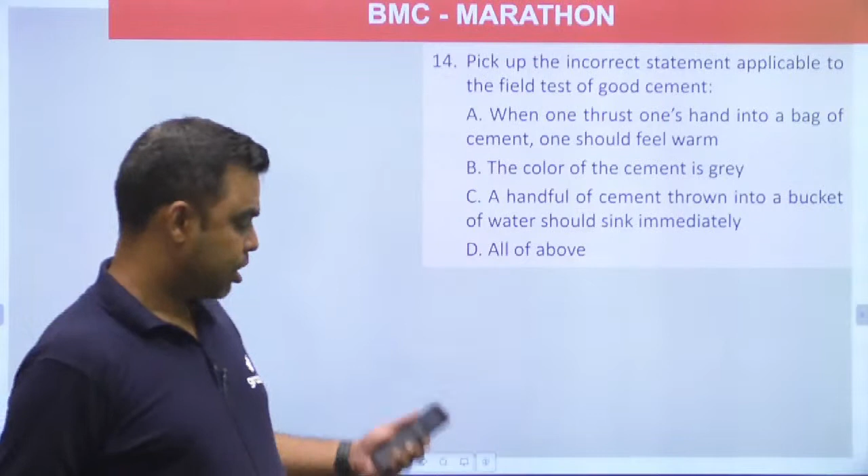Incorrect statement. Guys, it is written over here, one should feel warm. This is wrong. Rather, one should feel what? Cool. Like Dermi Cool, right? Further, color of cement is grey. No, it is greenish grey. Agreed? Should sink immediately? No. It should float for some time, and then sink.

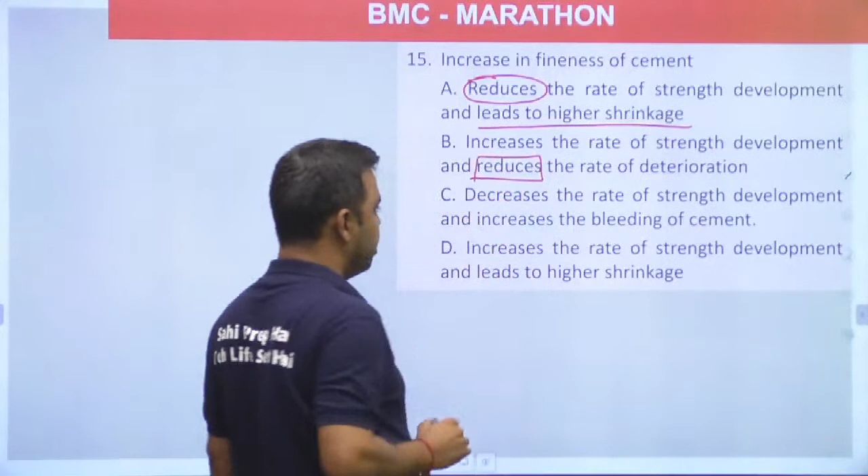No guys, it increases the rate of strength development and it reduces the bleeding, because finer is the cement, less is the water wasted, right? Increase the rate of strength development and leads to higher shrinkage. Yes, answer will be D. Answer will be D, because finer is the cement, more water will react. Water will react faster with the cement.

So faster it reacts, more is the heat of hydration, and if more is the heat of hydration, more is the drying shrinkage. Over here, this will be shrinkage, and this will be called as drying shrinkage. There are different kinds of shrinkage. This will be called as drying shrinkage.

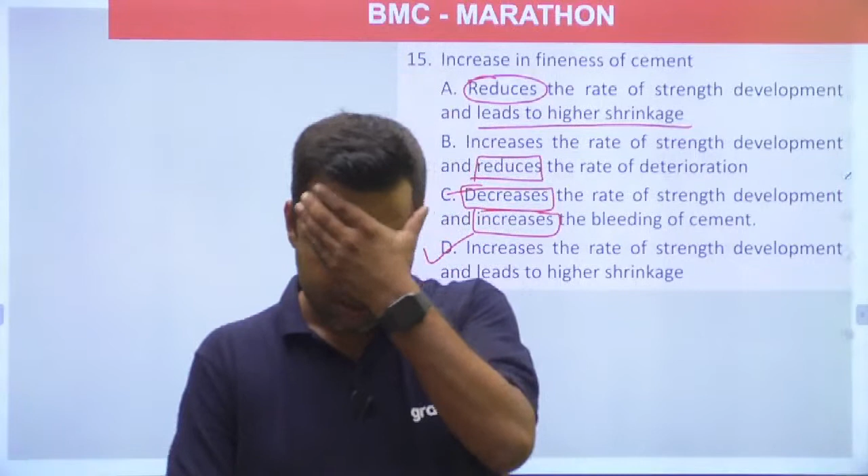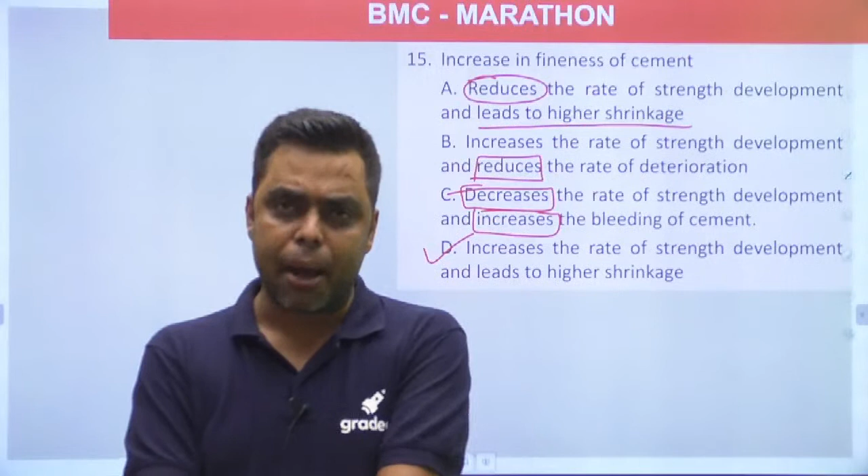Deterioration. See, what do I mean by deterioration? Like basically, do you know maida? Rathod ji, do you know maida? Do you know dalia? I'm going to tell you a very nice explanation on this. Okay, you want me to explain it in Hindi? ठीक है, I'll explain it in both languages. Do you know maida and dalia? Do you know flour, atta?

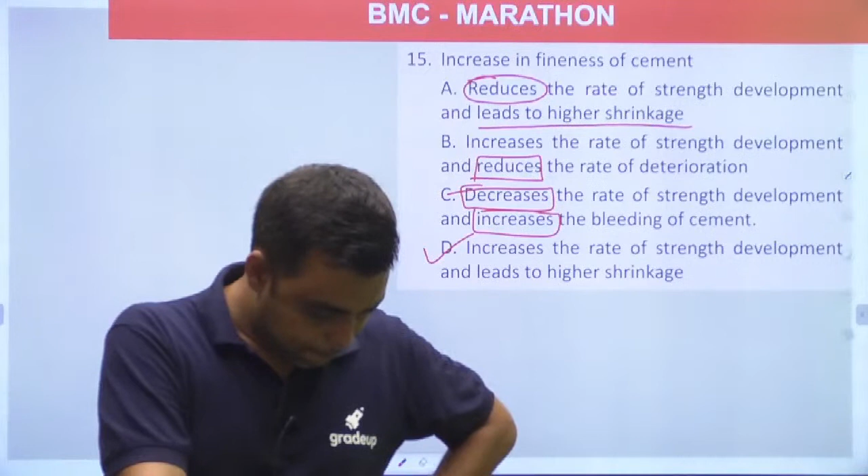Yes, Harshita ji, don't worry. I'll explain in English also. Now, basically, you know what is the raw material for dalia? What is the raw material for maida? And what is the raw material for flour? That is the atta. You know the raw material is same for all of them, and that is what? Wheat, gehu.

When you grind wheat on a lesser side, मतलब अगर कम grinding करोगे, then it is called as dalia. When you grind it finer, ठीक है, और ज्यादा ग्राइंड करोगे, then it is called as atta. When you grind it finest, then it is called as maida. And people tell that wheat is good for health and maida is bad for health. So beyond a certain grinding, what happens? The deterioration starts.

Right? The deterioration starts. And basically, when we grind cement even finer, 2250, 3000, 3250, these are the fineness values. So when we grind OPC even finer, it is more prone to react with the atmospheric moisture, and it is more prone to react with the atmospheric oxygen and the air.

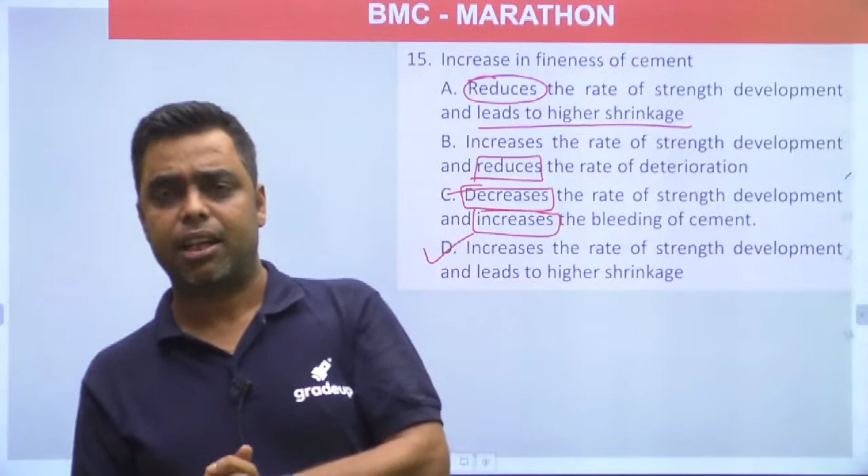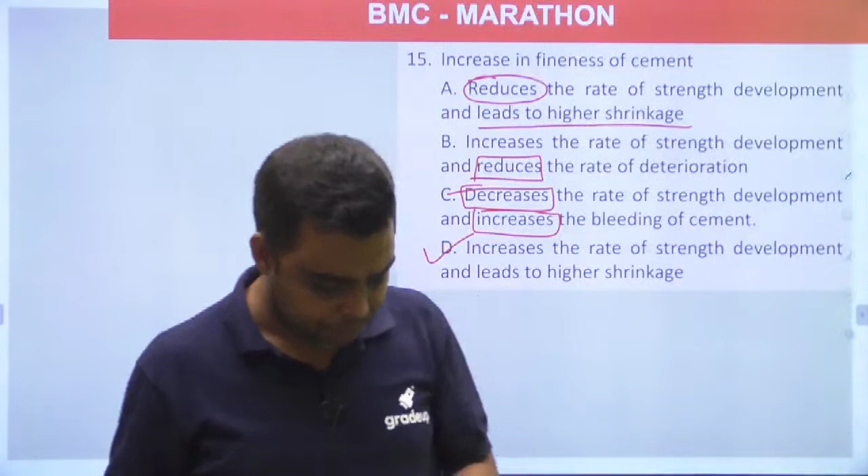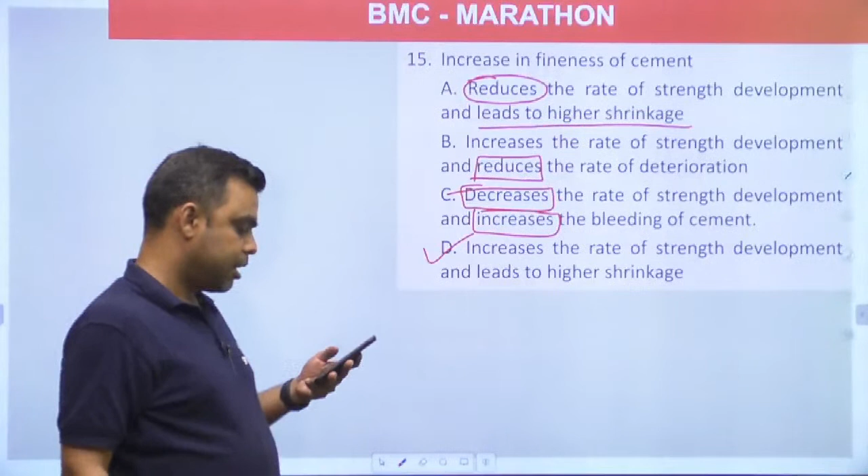So when it reacts with the air, what happens? Basically the lime which is present over there, that further dissociates. Agreed? That's the point. Yes, everybody got it? Clear? Next.

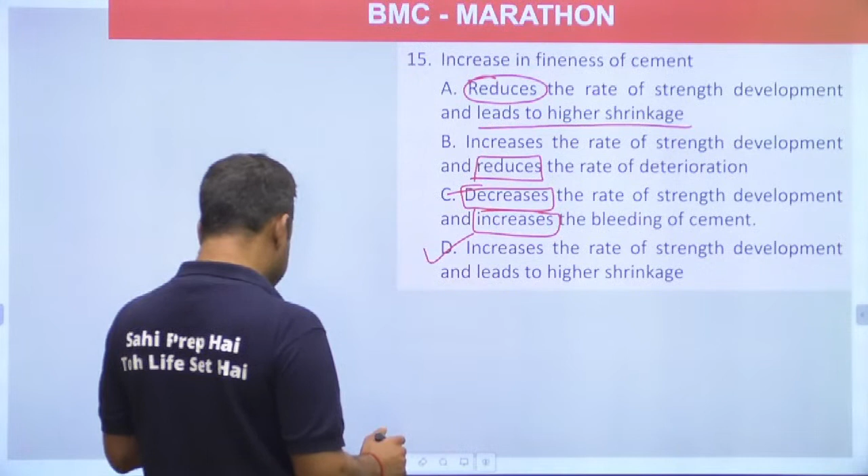Praveen ji, did you get it? Harshita ji, did you get it? Praveen ji, did you understand it? I guess the language was not an issue for both of you. Welcome. Harshita ji, you also understood?

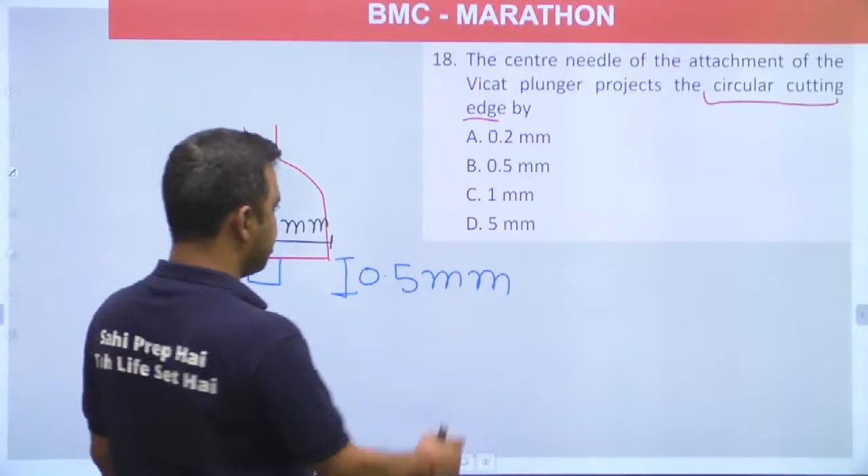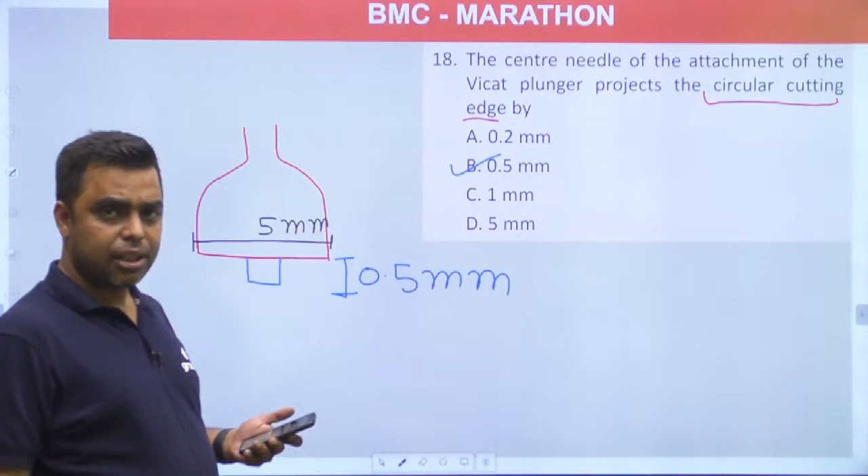Yes, so answer will be B. 1 mm square is something different. 1 mm square is the size of the needle. This is 1 mm by 1 mm.

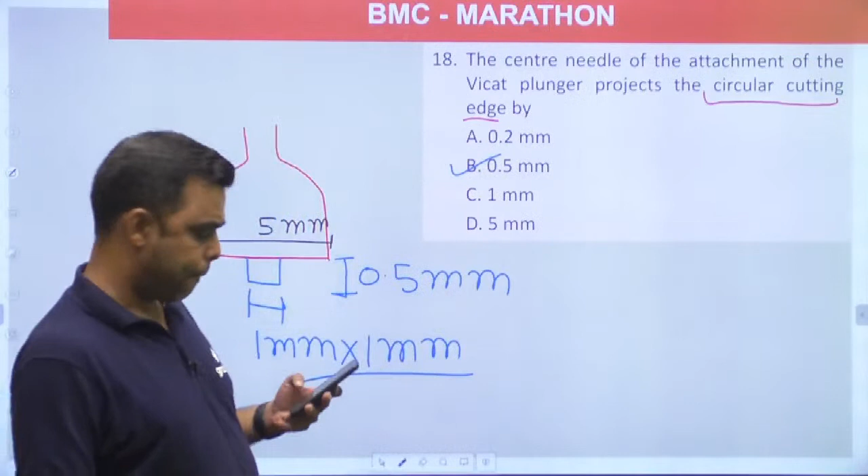Amit ji, basically 3 marks question. Every question will not be appropriate to 3 marks. Right? Certain questions will be lengthy and certain questions will be shorter. If BMC is in the syllabus, what numerical will you ask in BMC? Right? So don't think that way. Just concentrate on the question, brother.

So quick setting cement, Delhi. I will form a numerical in this. Quick setting cement has initial setting time of 5 minutes. Then I will ask, what is the square of the ratio of final setting time by initial setting time of quick setting cement? Right? Shall I form a question like this? See, these type of questions will not be asked.

Right? So don't worry, Amit ji. Brother, don't worry. Whatever I am solving, the day you will give your paper, you will remember me. So many of you have followed me before the ESE prelims, and during ESE prelims, they got the same questions from the sessions which I took. Absolutely same questions. Some of you might be witness of it. Am I right or wrong? Some of you have followed me since the starting, and they must have noted that the questions which I taught in the session were asked.

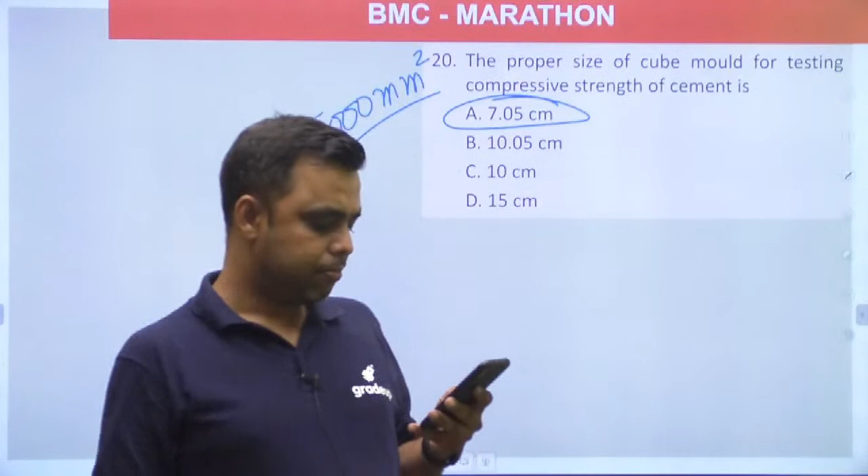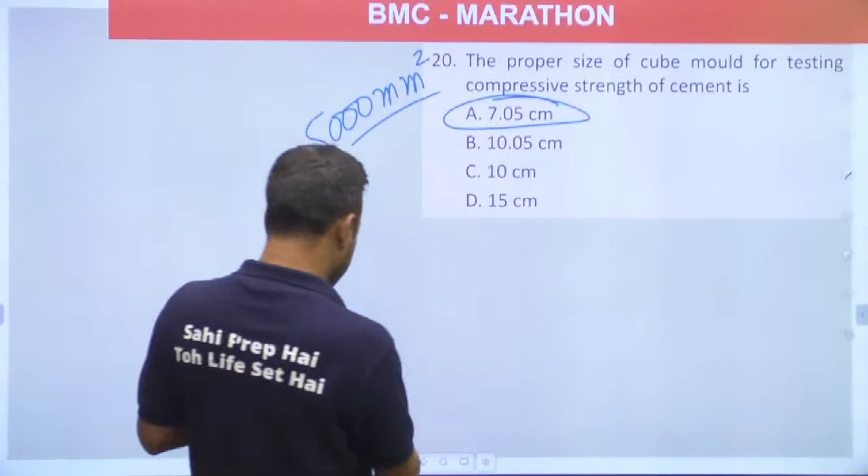Next, compressive strength of OPC 33 after 3 days. Are you guys aware about it? So, compressive strength of OPC after 3 days. For 3 days, it is half of 28 days. For 7 days, it is approximately two-third of 28 days. Right? So answer will be what? OPC 33, 3 days, half. Nearly 16. Clear? Next question.

Sani ji, I used to teach. If you want, I can teach. See, I can teach almost every subject.

So guys, this question is something new for you. Good afternoon, Masoor ji. See, after this 1982, we have a couple of revisions. One was in 2009 and, if I am not wrong, 2019. 10262, this is the code for mix design. A, B, C, D, E and F. Like this, the cements were classified: 32.5 to 37.5.

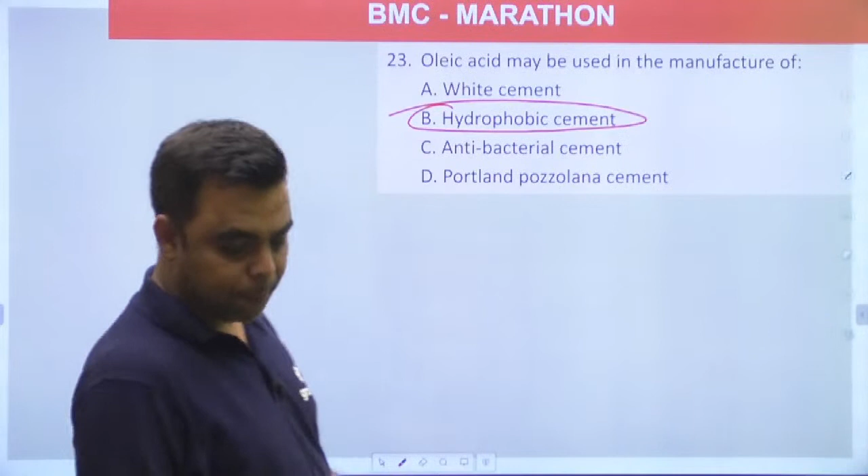Good one. Next, this one, very easy, very easy. See, for 43 grade 28 days strength, so it will be 43. So for B it will be 2. For B it will be 2. So answer will be either A or B. C and D cannot be the answer. That is for sure. Right?

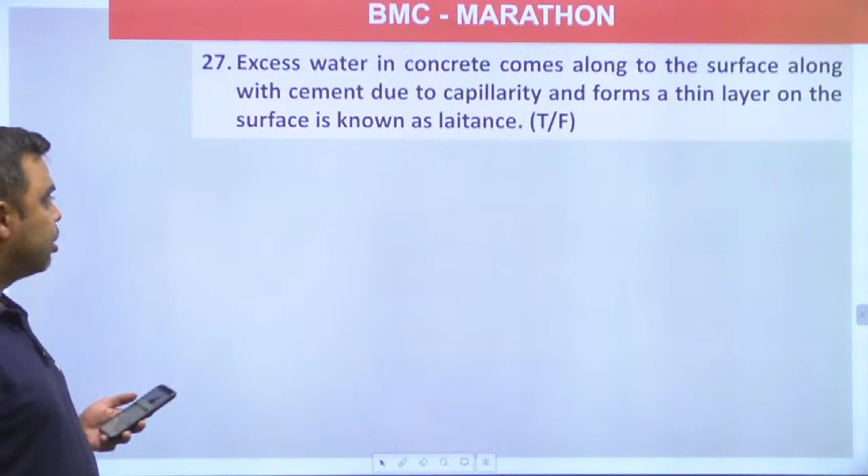Saurabh ji, done? Is it done, Saurabh ji? Sure. Next question. Many of you have answered this question already. What is the answer? True, right? True.

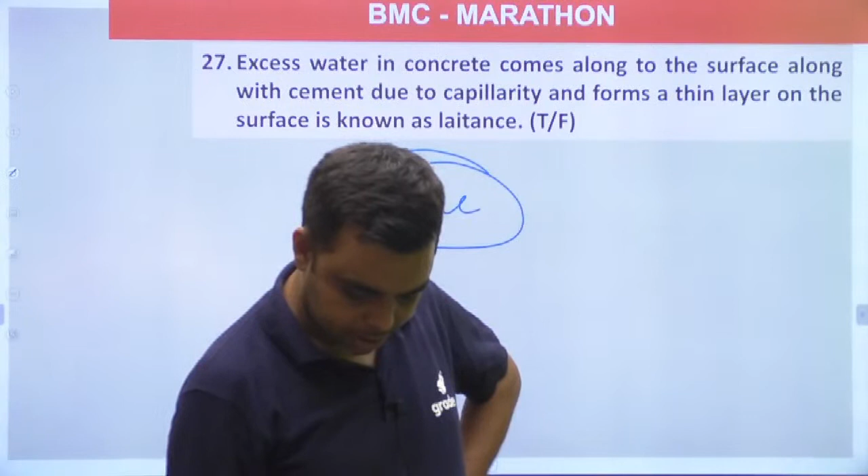Right, Amit ji, not only capillary, there are many reasons for the bleeding. There are many reasons for the bleeding.

There are many reasons for the bleeding. Yes.

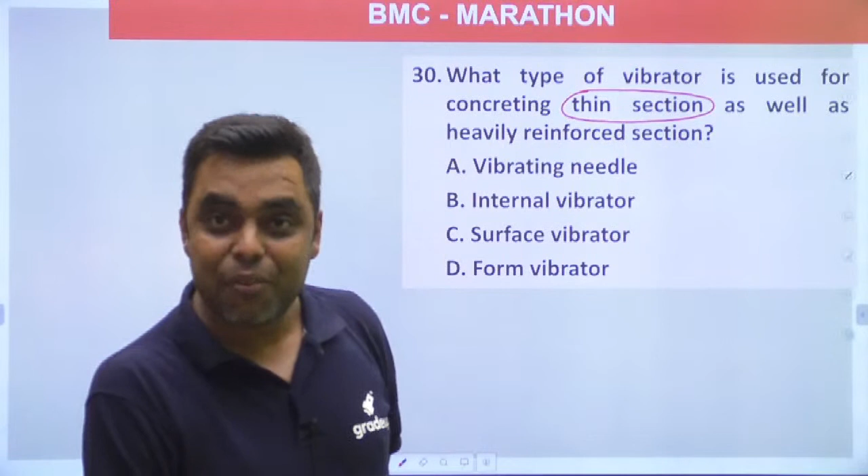Guys, just read the question. I again and again repeat that ijjat given to the question is directly proportional to ijjat received. Guys, are you aware about this fact that vibrating needle and internal vibrator, both of them are the same thing?

In KBC you have lifeline. This is my KBC, right? Thank you Sani ji, thank you. This is my KBC, so there is no lifeline. In life you don't have options always, brother. अभी जीवन जियो, आगे पता चलेगा। हमेशा जीवन में ऑप्शन नहीं मिलेगा।

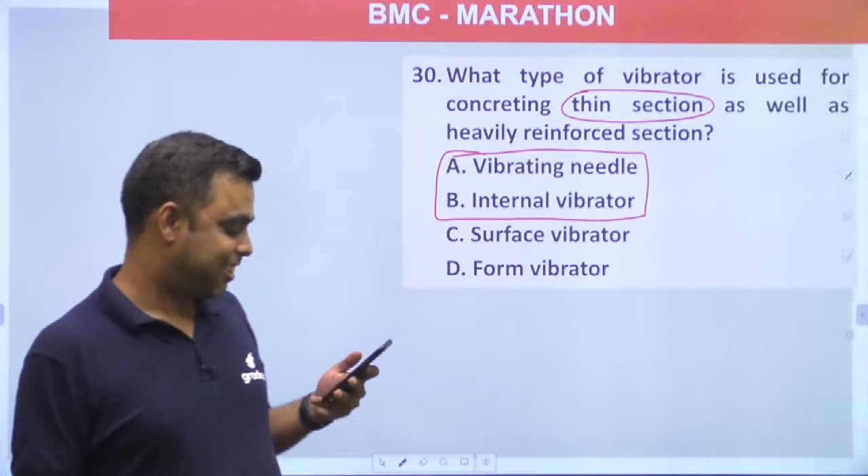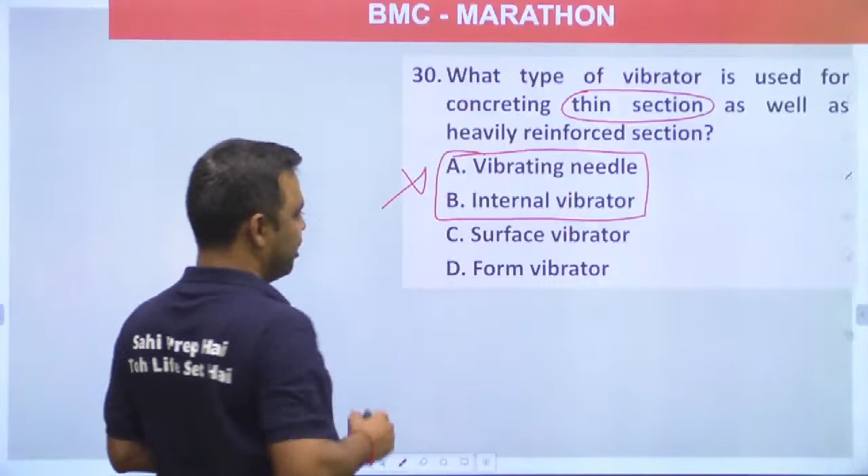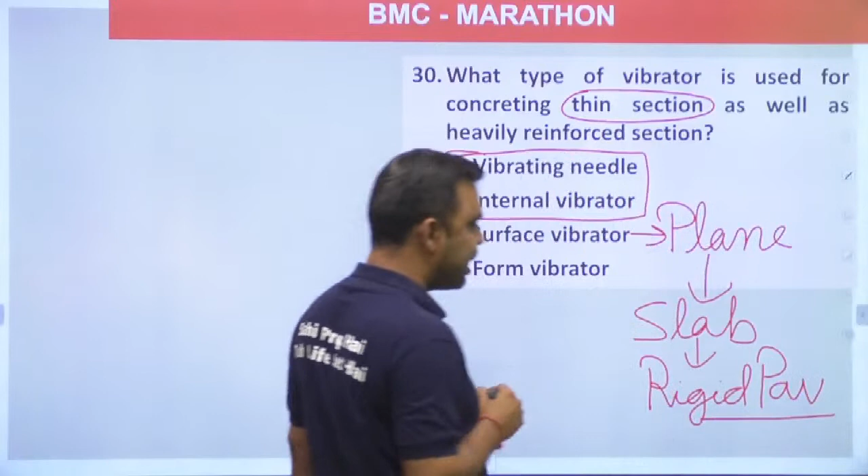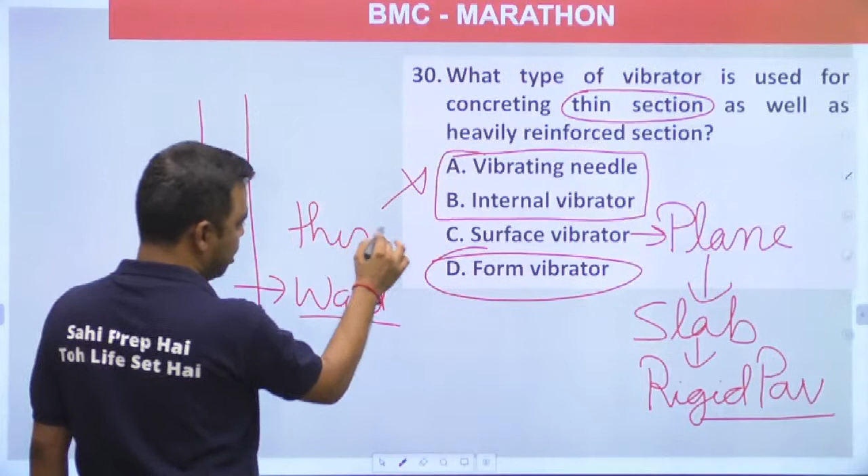चलिए, so both are same, so definitely A and B can never be the answer, right? Surface vibrator, see, surface vibrator is used in case of plane section, like slab, basically rigid pavement, right? So basically what is the answer? Form vibrator, that is thin section, means some thin wall, right? So what will be the answer? You can mail them, brother. Masoor ji, answer is D.

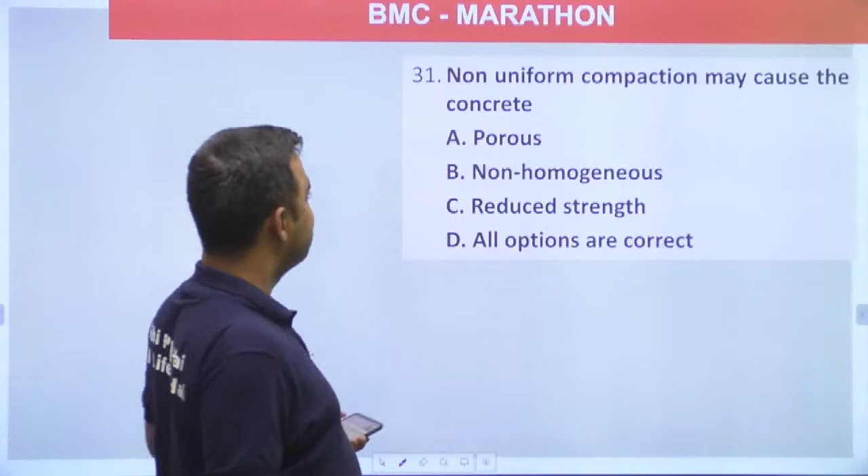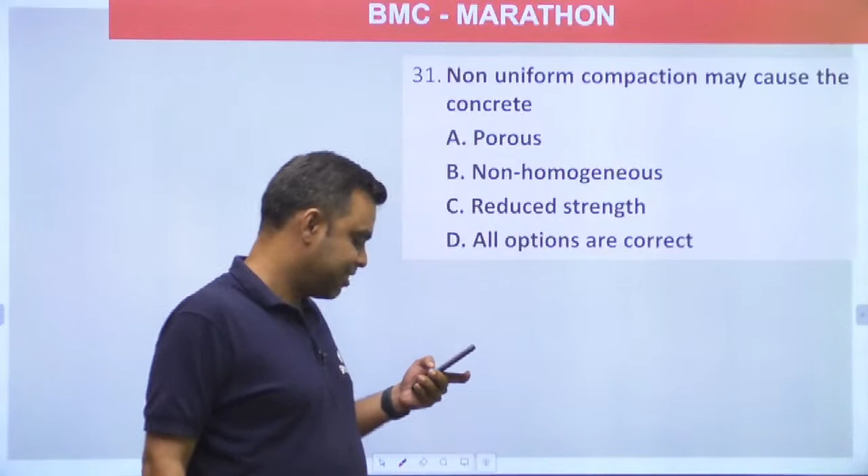What is the answer over here? D. If compaction is not proper, it will be porous, non-homogeneous, the strength will be less, right?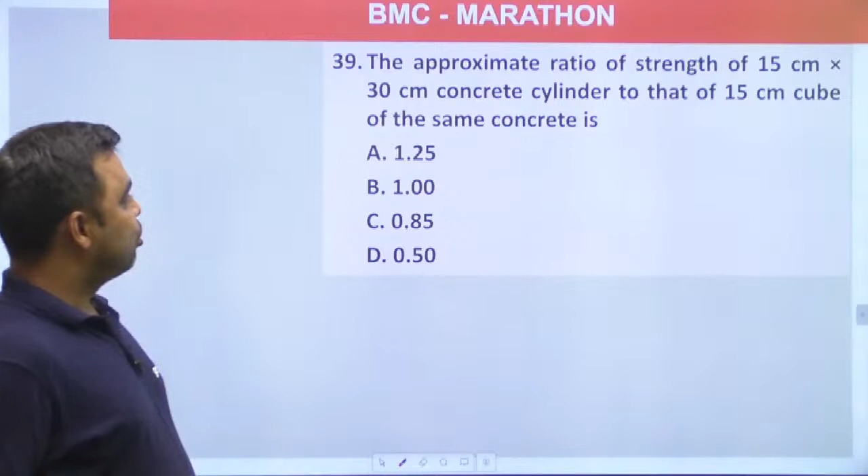Now, what is this ratio? So, cylinder by cube, right? Cube strength is more than cylinder. How much? Basically, cube strength is 1.25 times the cylinder strength approximately. So this ratio comes to nearly about 0.85.

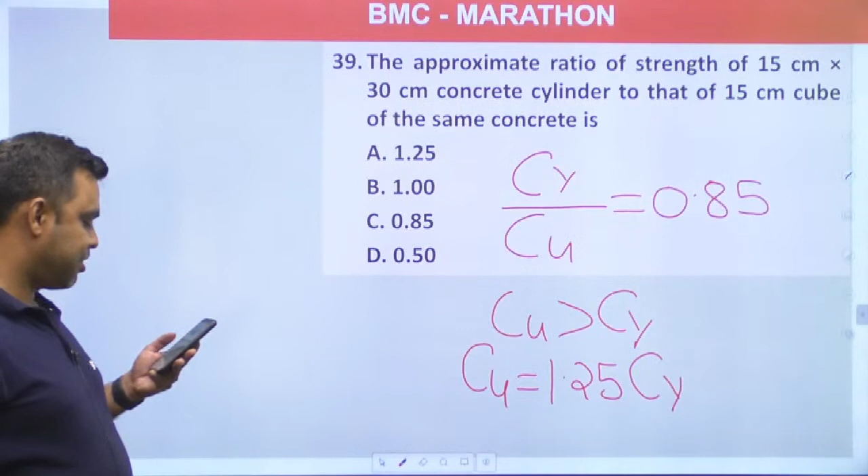Don't worry, Shubham ji. I don't concentrate on anybody. I'm neither concentrating on you also. I'm only concentrating on the question. That's it. I told you I always be in the present. I'm not concentrating on the previous question or the next question. I'm only thinking about the present question. That's why I'm not committing any mistake. The concentration level has to be higher.

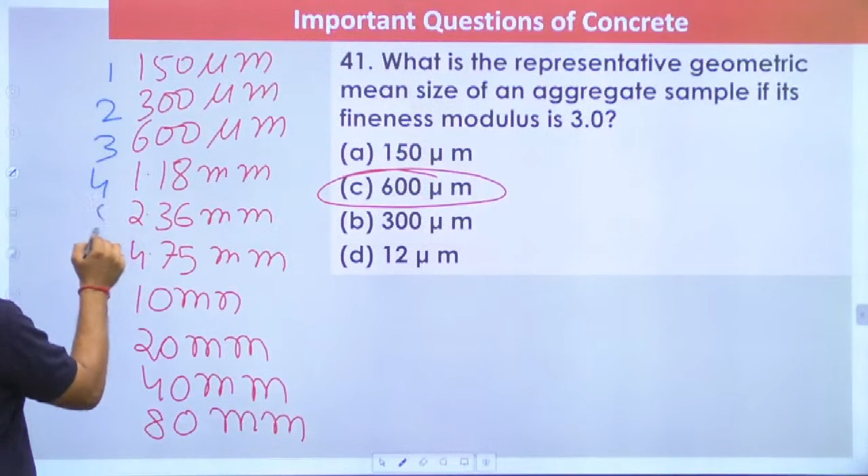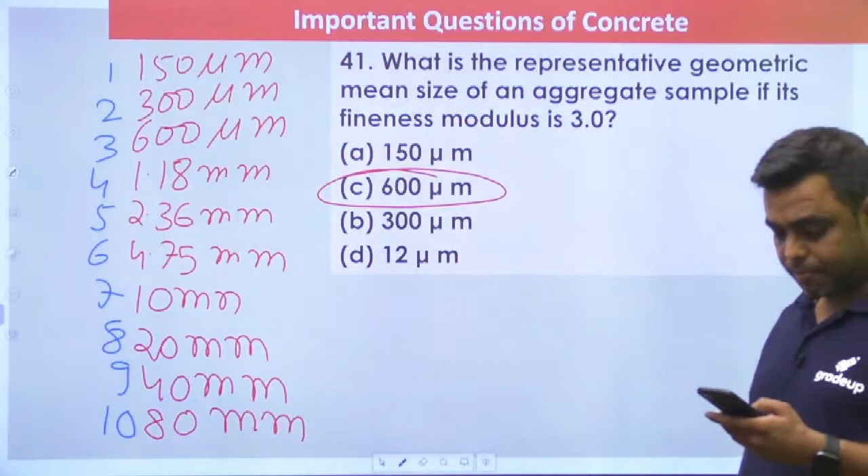So what will be the answer? 600 micrometer. First one is 150 micrometer, then 300, then 600, then 1.18, then 2.36, 4.75, then 10 mm. All these are in mm. Then 20 mm, then 40 mm, then 80 mm, right? The fineness modulus is in terms of number 1, 2, 3, 4, 5, 6, 7, 8, 9, 10. 10. Agreed? Next.